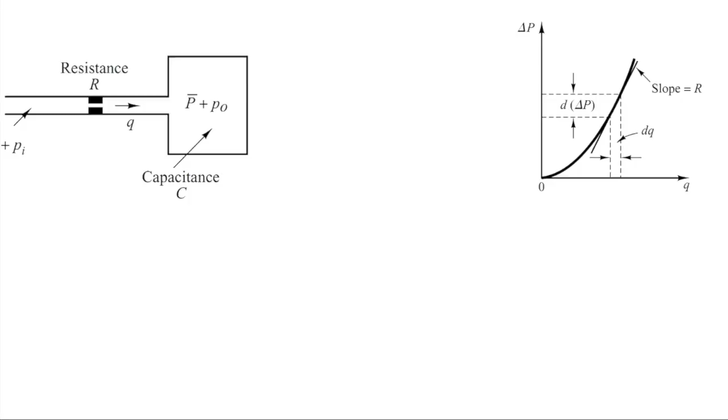Hydraulic systems, by this word we refer to oil hydraulics, which uses oil, and this oil is incompressible in nature. Whereas in pneumatic systems generally air or gases are used as the power transmitting medium, and these air and gases are compressible in nature, where oil is incompressible.

We will discuss this hydraulic system in detail later, but it is pertinent in this particular lecture to compare these pneumatic systems as well and hydraulic systems.

So number 1 difference is that this transmitting medium, one is incompressible, another is compressible. And number 2 is that air lacks lubricating property, whereas oil is also having lubricating property. So oil is used as a medium for power transmission as well as lubrication of all the components which are used in case of hydraulic systems.

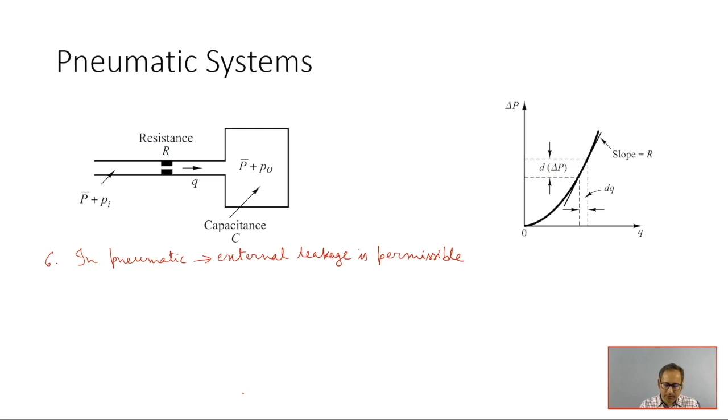Next comes number 6. In pneumatic systems, external leakage is permissible to a certain extent, but internal leakage must be avoided because the effective pressure difference is rather small. In hydraulic system, internal leakage is permissible.

So number 7 is no return pipes are required in pneumatic systems when air is used, whereas they are always needed in case of hydraulic systems.

So number 8 is normal operating temperature. For pneumatic systems this range is 5 degree centigrade to 60 degree centigrade, and this is generally acceptable. In case of hydraulic systems - here hydraulic means oil hydraulics only, not water hydraulics - the operating temperature range is 20 degree centigrade to 70 degree centigrade, almost comparable.

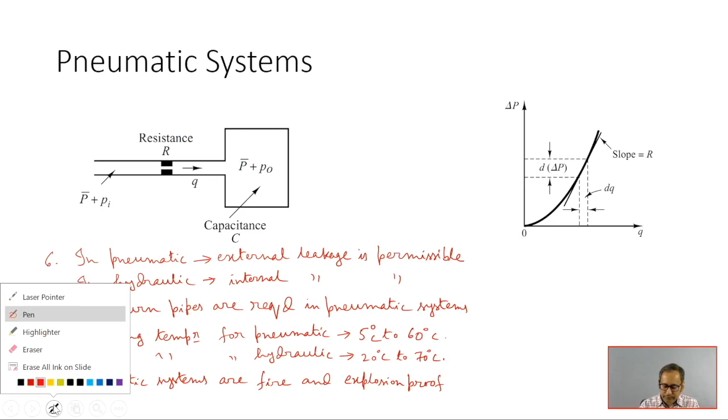Now I will give detailed discussion on the principle by which this proportional controller, by which different controllers can be designed using both pneumatic systems and hydraulic systems. Pneumatic systems comes first. Throughout the discussion I shall place emphasis on the principle of operation rather than on the details of the actual mechanisms. Only principle will be discussed. This pneumatic systems actually will be discussed first.

These characteristics of pneumatic systems are again described with the concept of resistance and capacitance. You can see from this figure, one is resistance R, another is capacitance C, similar to the liquid level systems. This P bar is the steady state pressure. Now if you change this steady state value, if there is a small variation of Pi, then there will be small variation of input flow, input pressure, and then there will be small variation of output pressure.

So in this particular system, this flow of air is filling up this particular vessel - this is the pressure vessel. Generally in pneumatic systems, different pressure vessels are connected through pipes, and inside the vessels this air or gases are stored at a higher pressure. That pressurized gas is used for opening and closing of different valves used in industrial automation.

So in this figure you can see this airflow Q is going to the vessel, and as a result this vessel pressure is increasing. Now if the upstream and downstream pressures are the same, that is at steady state P bar, then this net airflow will be zero. Now if there is some differential pressure, that is if there exists some delta P which equals Pi minus Po - input pressure small variation minus output pressure small variation.

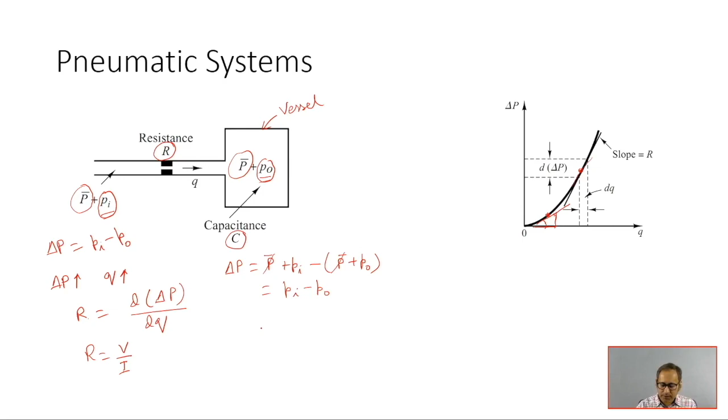By measuring this, as you have seen in the case of liquid level systems, this same concept is used here. Next is C, capacitance. So now let us focus on this capacitance C.

This capacitance C is defined in the same way: change in gas stored inside the pressure vessel divided by change in gas pressure. That means it is equal to dm by dp, where dm means V times d rho by dp, and rho is the density.

So it is in the same line again, analogous to electrical systems and liquid level systems. Let us now focus on this particular pressure system. In this context, R equals Pi minus Po, that is delta P, divided by Q, and C equals dm/dp.

That means the pressure change dpo times the capacitance C is equal to the gas added to the vessel during dt seconds. So in a small time dt, this pressure change dpo times C gives that relation.

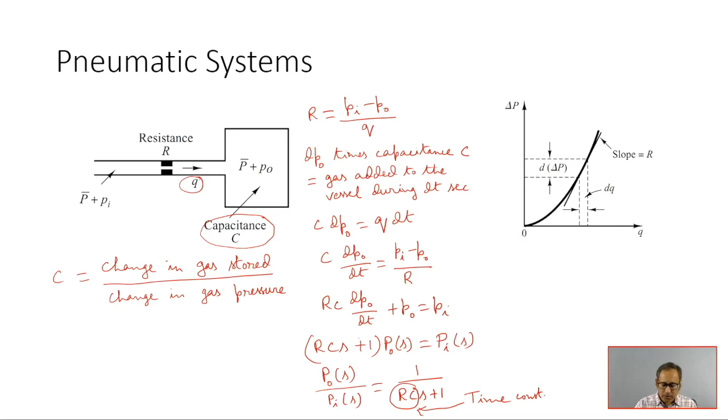So next, coming to the next slide, I am going to discuss pneumatic nozzle flapper amplifiers.

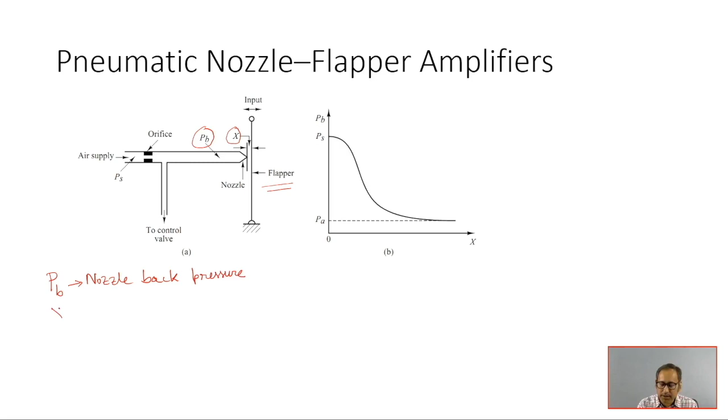This is controlled by the nozzle flapper distance X. As the flapper approaches the nozzle, the opposition to the flow of air through the nozzle increases. That means as X is reduced, X tends to 0, the flapper moves closer, so X is reduced, putting more restriction on the air flow, which results in an increase of the back pressure Pb.

If the nozzle is completely closed by the flapper, the nozzle back pressure Pb becomes equal to the supply pressure. If the flapper is moved away from the nozzle, so that the nozzle flapper distance is wide, then there is practically no restriction of flow, and the nozzle back pressure Pb takes on a minimum value that depends on the nozzle flapper device.

Look at this particular graph. Along this x-axis, this is the nozzle flapper distance. At this point it is wide open. So when it is wide open, the back pressure Pb drops to the atmospheric pressure Pa. There will be no restriction when this is wide open.

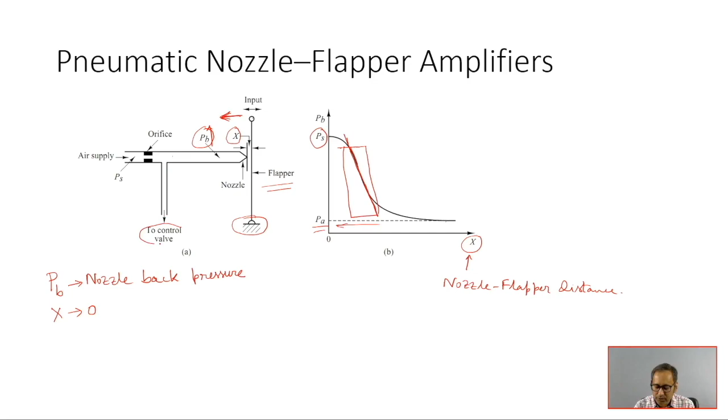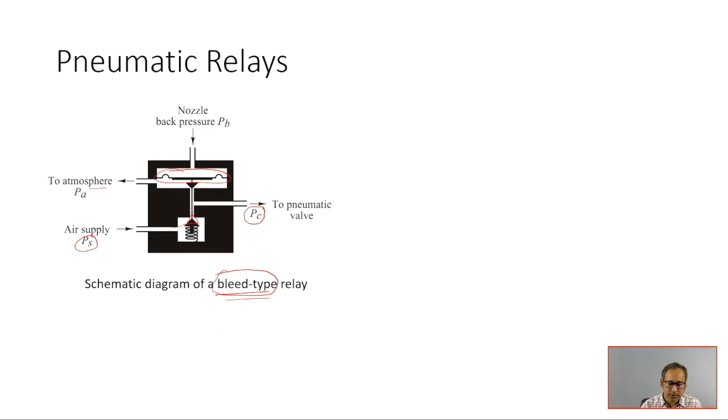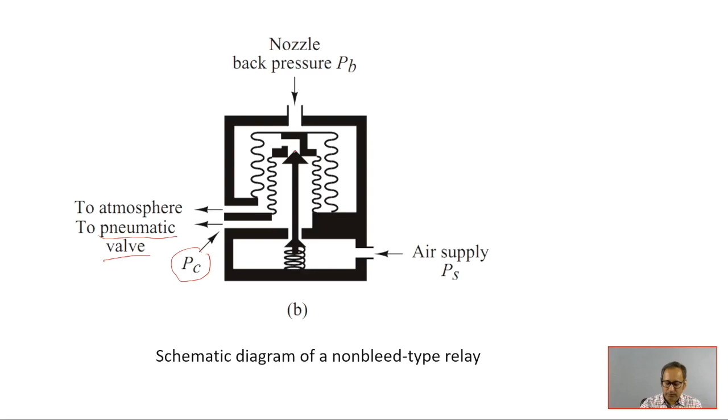So it is actually reverse acting. Generally, these relays are used in forward acting mode, meaning when back pressure increases, the control pressure also increases. But here the opposite happens — when back pressure increases, the control pressure decreases. This is called the reverse acting relay.

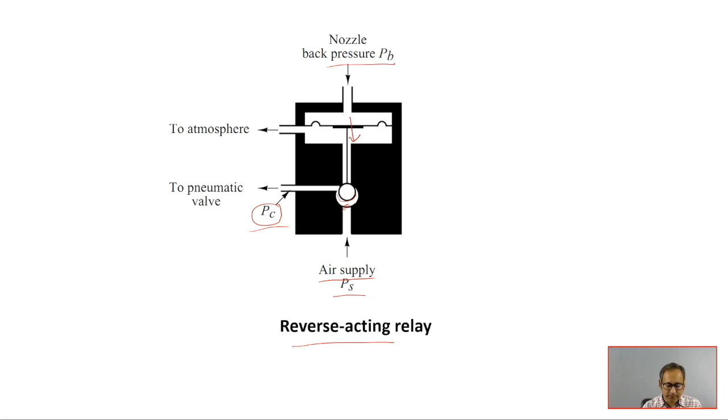Now I am going to discuss one pneumatic proportional controller. There are two types of controllers: one is force distance type, another is force balance type. In this lecture, I will focus on the force distance type. You can see in this figure the orifice flow here; the supply pressure is directly connected to the control valve, and the corresponding pressure is PC. As usual, this PC bar stands for the steady state value — all these bars stand for steady state values.

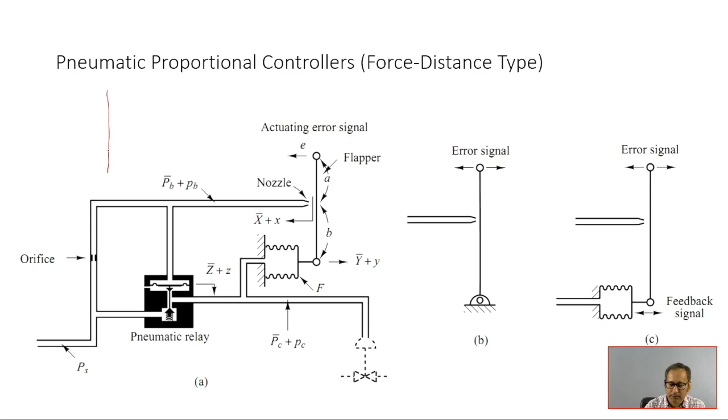So, if you give some actuating error signal here, this will be positioned like this. So, this distance is B from this point to this midpoint, and this distance is A. So, that means this is your A and this is B. So, actually we are concerned with this distance from here to here. So, let us say this is how, what will be this distance? Let us say this is D here.

So, D divided by E, using these similar triangles, D divided by E equals B divided by A plus B. That means D equals B by A plus B into E. So, this is your B by A plus B into E.

Okay, similarly, if you consider now this is, I have told you that this is also a linear system, a linearized system. That means you are considering small variations of x, z, pb, all the variables are having small perturbation. So, this can be approximated as a linear system, and in case of linear systems, the principle of superposition is valid. So, according to principle of superposition, this is one case.

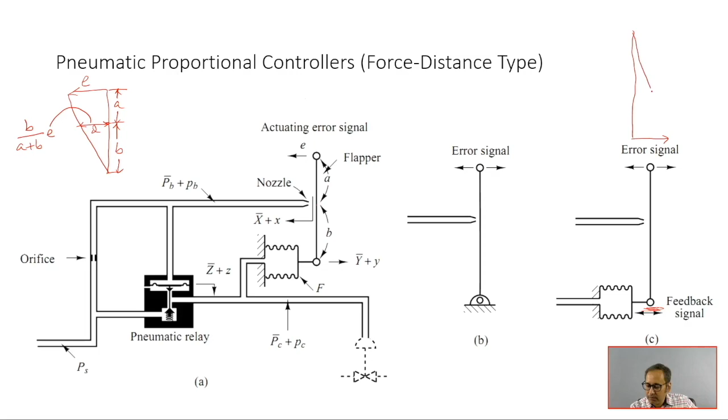So, this is actually original position. Now, due to this movement, this will be shifted to this side. So, let us say this is your small y, and this is your b, and this is a. So, what is this distance now? In the similar fashion, this is a by a plus b into y.

So, if you apply the principle of superposition, this is the original flapper, this is the signal E, and this is the signal Y. Notice that E should be greater than Y, otherwise you will not get this distance. If E and Y are almost same, this will be less, and if A and B are same and E and Y are same, then there will be no displacement of the flapper-nozzle distance.

To obtain this finite displacement, E should be greater than Y, that is, the feedback signal should be less than the actuating error signal. So, if the principle of superposition is valid, then this length x equal to b by a plus b into E minus a by a plus b into y. This relation is important for further discussion.

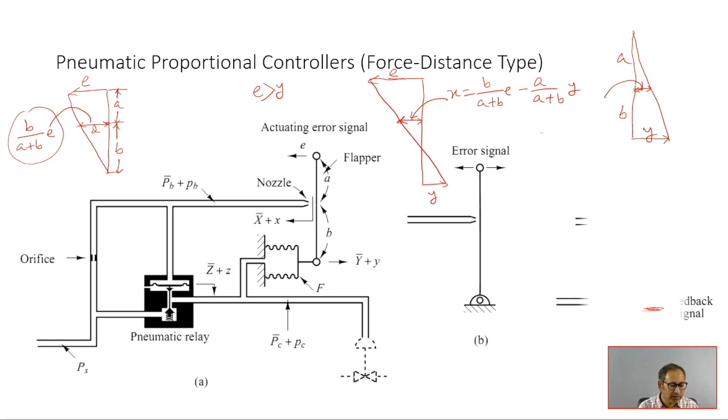Let us see the relation between Ys and Pc. So, Pc into A, where Pc is your control pressure and A is the area. Pc into A equal to Ks, the spring equivalent stiffness of the corrugated sheet, into Y.

So, Ys equal to A by Ks into Pc. Taking the Laplace transform, Ys equal to A by Ks into Pcs. We derived this earlier: Ys equal to A by Ks into Pcs. The Pcs multiplied by A by Ks gives you Ys.

In this summation block, you get the relation we derived: x equal to B by A plus B into E minus A by A plus B into Y. Taking the Laplace transform, B by A plus B into Es is the positive terminal, minus A by A plus B into Y is the negative terminal. So, you are satisfying this xs.

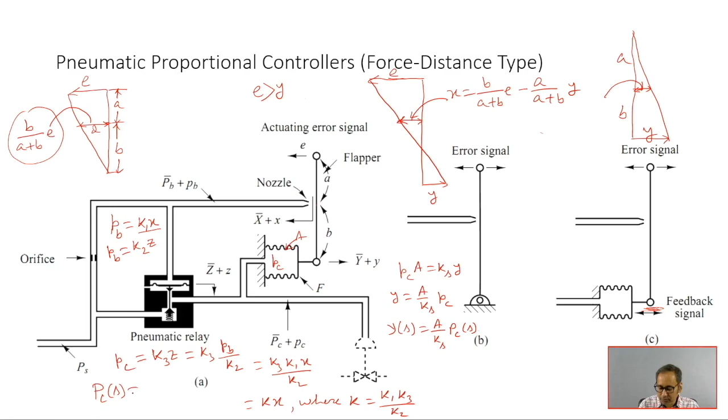So, Pc equal to Kx, that is, Pc S equal to K into Xs, as given here. This is the block diagram constructed for this pneumatic nozzle flapper amplifier. Now, this is the feedback signal, Y is the feedback signal.

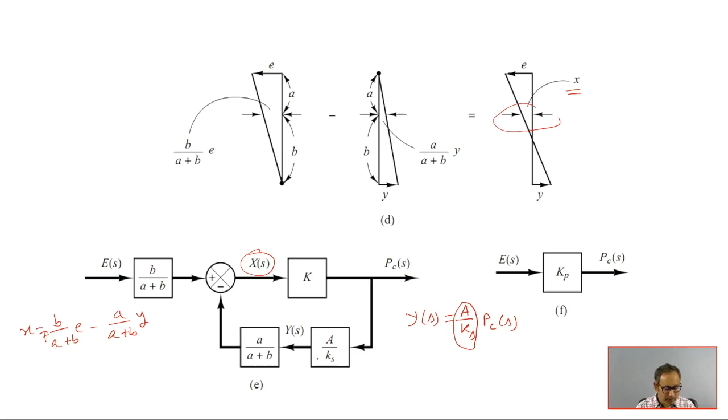So, if you find the transfer function Pcs by Es, it is equal to B by A plus B into K, since this is actually a negative feedback system, so it is G by 1 plus GH. This K divided by this is your H, and this is G, so G by 1 plus GH. This is replaced by this single block, multiplied by B by A plus B.

Now, although all are constant, you can vary this A and B by using a particular mechanism which is not shown in this drawing, but in most commercial proportional controllers an adjusting knob or other mechanism is provided for varying the gain by adjusting this A and B.

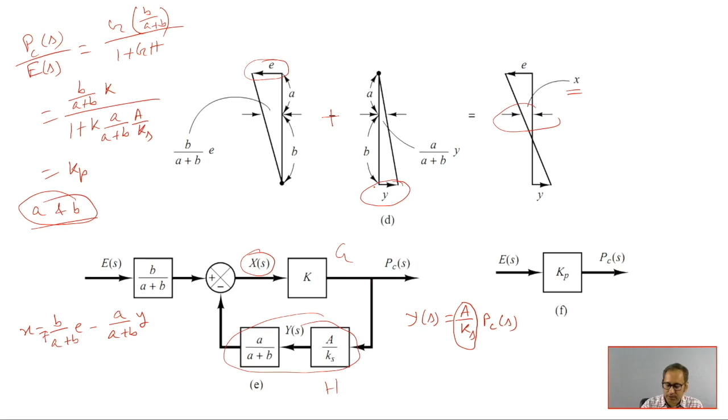So, see this particular feedback mechanism, this Y, this is actually negating the effect of this actuating error signal. So, it is somewhat nullifying this actuating error signal. So, in that sense it is not very much sensitive. So, this plus this equal to this. So, this is not quite sensitive compared to this fixed fulcrum flapper.

So, that is the point to be mentioned here. So, see, it is actually this PS. If this is fixed position, then it is comparatively more sensitive, but you will not get the effect of this proportional control action. It is actually to some extent more sensitive, because it is not placed on the floating point, it is rigidly fixed on the pivot. So, there is no feedback coming here that will nullify to some extent this actuating error signal.

So, as soon as x is changed, see, there is a steep change here, this PS to PA, an abrupt change, but in case of the earlier design there was a gradual change. So, it is called pneumatic two position controllers. Pneumatic two position means on or off, two position controller or on-off controller.

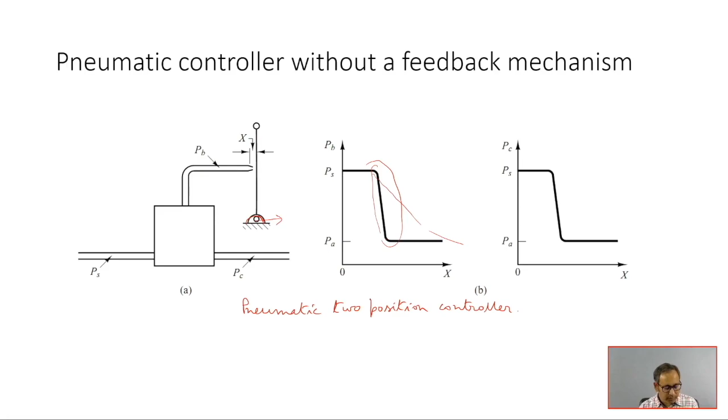So, now I am going to discuss this basic principle for obtaining derivative control action. So, the basic principle for generating a desired control action is to insert the inverse of the desired transfer function.

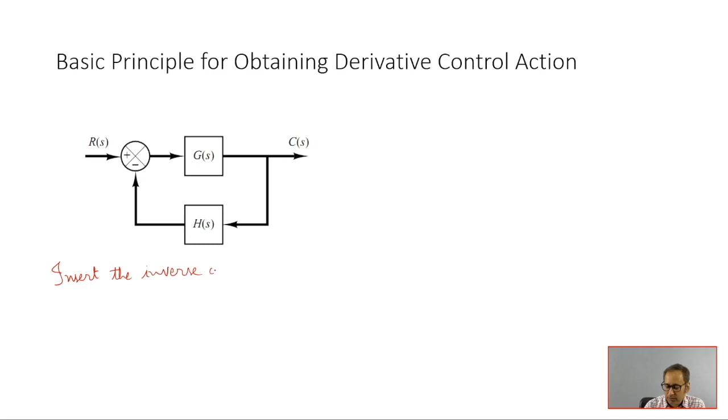Insert the inverse of desired transfer function into the feedback path. That means here. So, for this case, what is the closed loop transfer function? Cs by Rs equal to G by 1 plus GH.

Now, if GH is very high, then you can see that Cs by Rs can be approximated, since this one is negligible compared to GH. So, this is approximated by 1 by H.

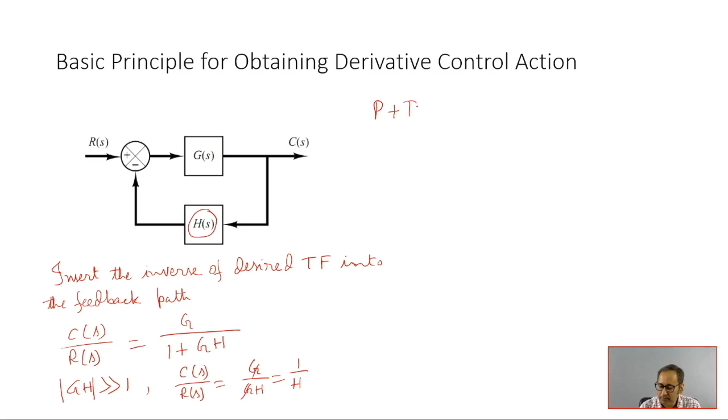Now, if proportional plus derivative control is desired, then we can insert an element having the transfer function 1 by Ts plus 1 in the feedback path. That means here Ts plus 1, if this is actually 1 by Ts plus 1, that equals Ts plus 1. So, if this is multiplied with this input, then it gives proportional plus derivative. So, this is the derivative term, this is the proportional term. That is the basic idea which we are going to use in the subsequent slides.

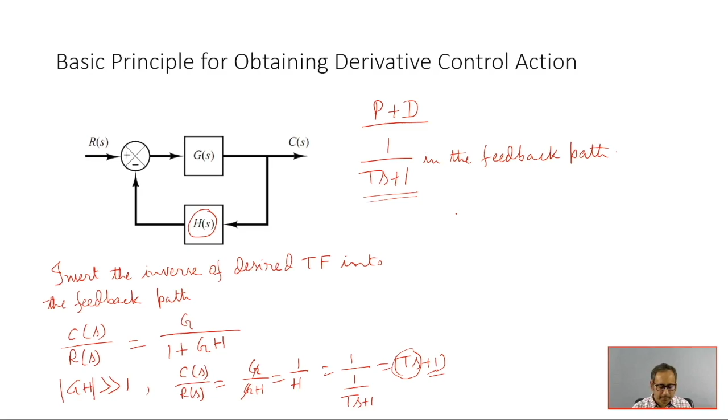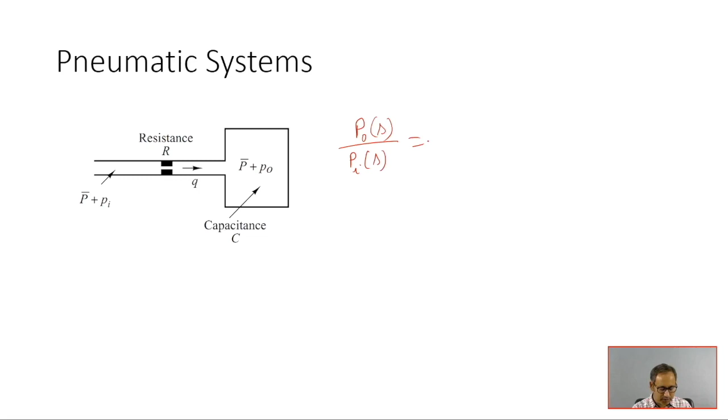You have already seen, I have discussed that in case of a pressure system, that P0S by PIS. Let me come to here. Here I was discussing the transfer function P0S by PIS. This was derived earlier as 1 by RCS plus 1. So, RC is basically the time constant. So, this is 1 by Ts plus 1.

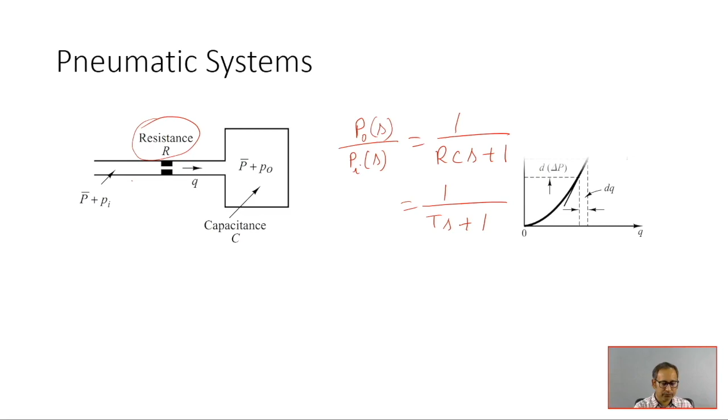So, that means if you put one resistance here, this is for this resistance R. So, if you put this resistance here, this downstream transfer function by upstream transfer function is equal to 1 by, having this type of structure. So, here also you will use the same idea. So, in this case, this pneumatic proportional controller.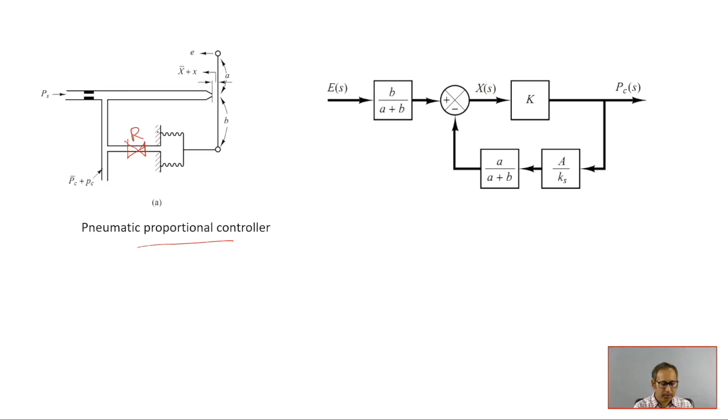Now, here see the difference between these two. In this case this is direct, so it will lead to a proportional controller. Now, if you put one restriction here, that is the R element, that is done here. So, that will give you this pressure divided by this pressure, equal to 1 by RCS plus 1.

So, that means here you can see, in this case, this is your RC, 1 by RCS plus 1, that means up to this it is okay.

ES, B by A plus B, there is no change in this structure, A by A plus B, A by Ks.

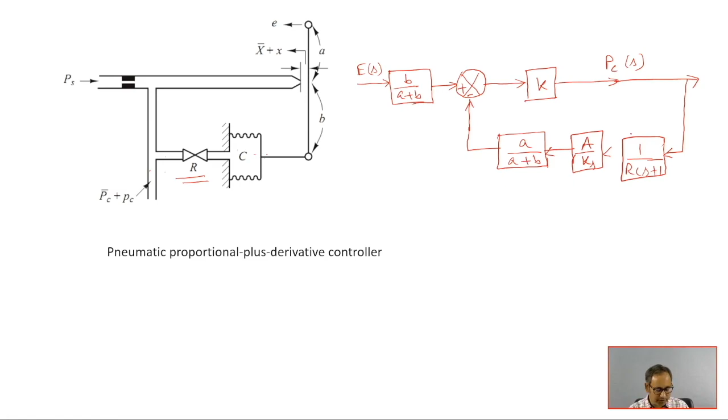So in the feedback path, this 1 by Ts plus 1 type of transfer function is incorporated. So after this, it is connected as it is, as before. So only change is happening here. This PCS is forced to go through this particular resistance, and that will include this type of transfer function in the feedback path.

Actually, this idea is that this pressurized control pressure, this PC, this particular air is slowly going to this capacitor C. So if you consider this actuating error signal E versus time t, let us say this is the actuating error signal. You have pressed this particular pedal like this. So this control pressure PC, we plot this PC versus time.

So that means this effect, this is the effect of addition of the restriction in the negative feedback path. This will modify this proportional control to proportional plus derivative control. So this is actually PC will be gradually...

And similarly this X also. So that means this feedback bellow, this is called the feedback bellow. This feedback bellow will feel the full effect of the actually, this feedback bellow will not respond momentarily.

As soon as you are giving this X, this feedback bellow will not respond momentarily, and the pneumatic actuating valve will feel the full effect of movement. Just to make you understand physically, when you are giving this E, at this particular moment this Y will not be affected, Y will be almost 0 because of this restriction.

So this feedback bellow will not respond momentarily, and the pneumatic valve will feel the full effect of the movement of the flapper. As time goes on, the feedback bellow will expand. The change in the nozzle flapper distance will be in this particular way. So this is the clear characteristics of the proportional plus derivative control action.

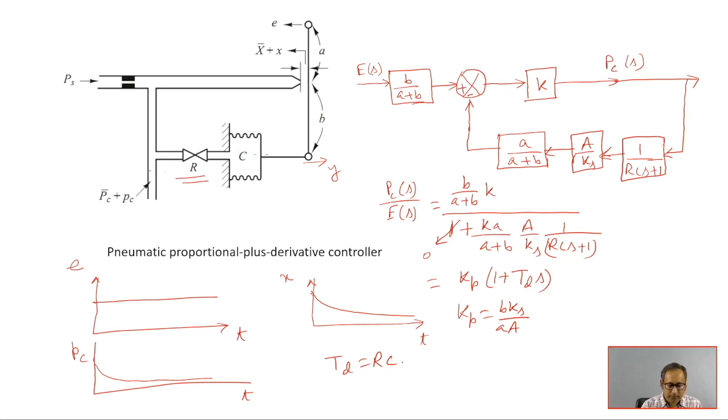So you will get this structure, this is equal to Kp times 1 plus Tds, where Td is the differential time and Kp is the proportional gain. Kp equal to Bks by Aa, and Td equal to Rc, the differential time constant. So this is actually the basic principle of pneumatic proportional plus derivative controller.

Next, this is pneumatic proportional plus integral controller. In this integral controller, this design is slightly different. This restriction is given here instead of the previous point, it has come to this point. In case of derivative control, it was here; in this case, it is at this point. So this bellow is separated by two chambers, 1 and 2. This whole capacitance is C.

Now, when this will be moved in this particular direction, if you plot this error signal as before, the error signal is this constant signal you are giving. So, what is the displacement of x now with respect to time? So, x will be started here.

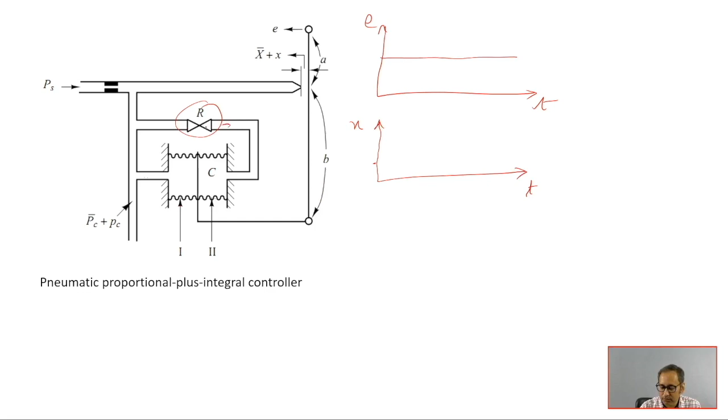See, initially this part is restricted, fluid flowing through this part is restricted. Now this part is open. This bellow has one link at the intermediate point of the bellow, connected to the floating point. So initially this will affect this feedback y. So this y, it will feel the effect of this feedback. So due to this y, this x will be reduced, the x will be starting from here, let us say.

So, as time goes on, this air flow will start, air will flow through this restrictor and it will apply force in the opposite direction. So this will come to the opposite direction, and it will gradually nullify this effect of y. So that means as this x gradually nullifies this effect of y, this x will also increase.

Similarly, this Pc, control pressure Pc, will also follow this particular path. So this is the characteristics of PI control. So in this case, this PCS, this block diagram, I think it is drawn here. Yes, the block diagram is drawn here.

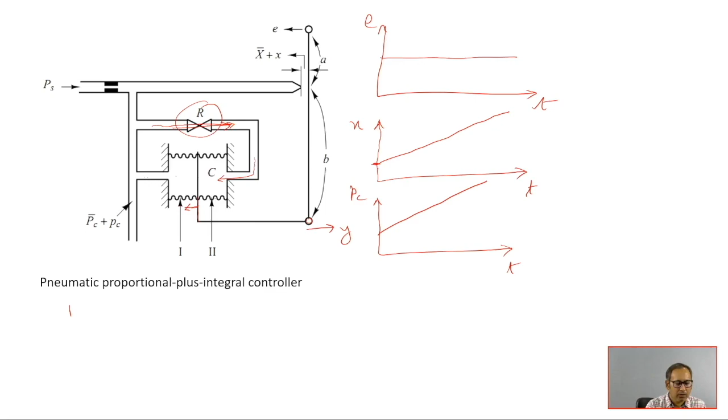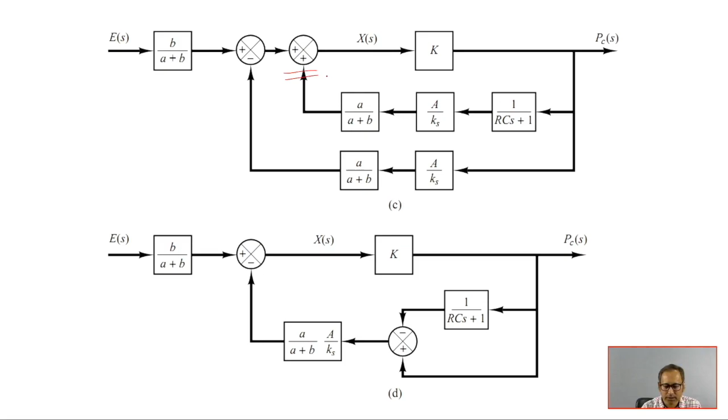In this case, this is the corresponding block diagram. See, this is the summing block, that means two signals are summed up here. Okay, let me do one thing, let me copy this particular figure to here.

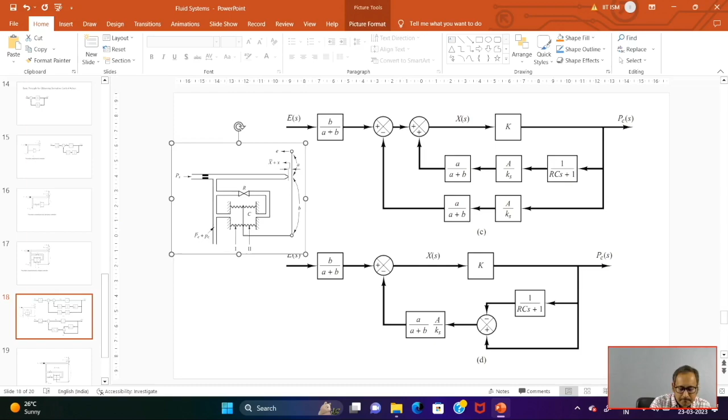Okay, now it is visible. So, look at this figure here. These two signals are basically, this part is okay. This is the summing block. Now, this is your positive feedback.

This is your positive feedback part. So, let me explain this one. This PC is connected to here. One is this one, this A by Ks, this is as it is in case of proportional controller. So, this part is already explained.

Now, come to this part. This restrictor is put here. So, due to this restrictor, this is the corresponding transfer function. So, then that is multiplied by A by Ks, then this part is okay.

So, this signal is going to add with this signal. So, this is the feedback signal. After this feedback signal, this was moving to this side. So, gradually it is again moving to this side. So, when it is moving to this side, look at this arrowhead of E. So, this is actually same arrow, same direction. So, that is why these two will be added. So, it is actually giving some positive feedback.

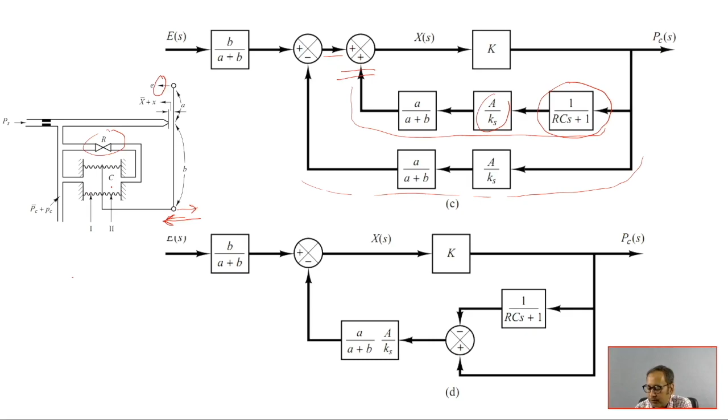So, now this is the next step. In the next step, this is actually simplified diagram of this. Up to this it is okay. Now, this is in this way, it is minus, this minus terminal is here, minus terminal is here. That means, this effect is, this particular position, this particular transfer function is same. So, that is why A by A plus B into A by Ks.

Okay. Now, this is common to both this path. So, next you consider this minus and this plus. That means, this plus into minus, that is, it is going to negative terminal, and this minus into minus, that is why it is plus. So, these two effects can be combined by this particular structure.

Now, this is in the next step, this is actually replaced by this signal into 1 minus, this is actually parallel connection. So, this whole thing will be replaced by this 1 minus 1 by RCS plus 1.

So, this is your PCS by ES equal to B by A plus B into K divided by 1 plus K A by A plus B, A by Ks into 1 minus, this is your 1 minus 1 by RCS plus 1.

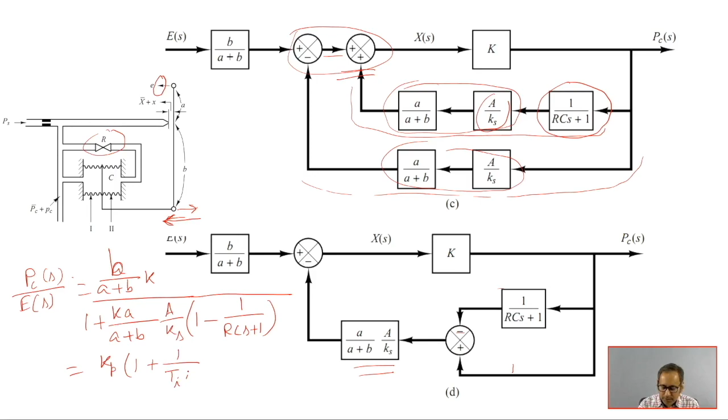So, this ultimately takes this form, this is ultimately simplified to 1 plus 1 by TIS. TI is the integral time constant. So, Kp is equal to proportional gain, Bks divided by AA, and Ti equal to Rc time constant, integral time constant.

So, next is proportional, this is your Pi control, P proportional plus integral, Pi control. PD control was discussed earlier. So, if you combine this PD and Pi control action, then you will be able to design and find out PID control. So, this is the combination of these two. See, this restrictor is put on this path as well as on this path.

Try to understand this difference. Here restrictor was put on this feed forward path. Here this restrictor is put on this feed forward as well as feedback path. So, it is leading to proportional plus integral plus derivative, that is PID control action.

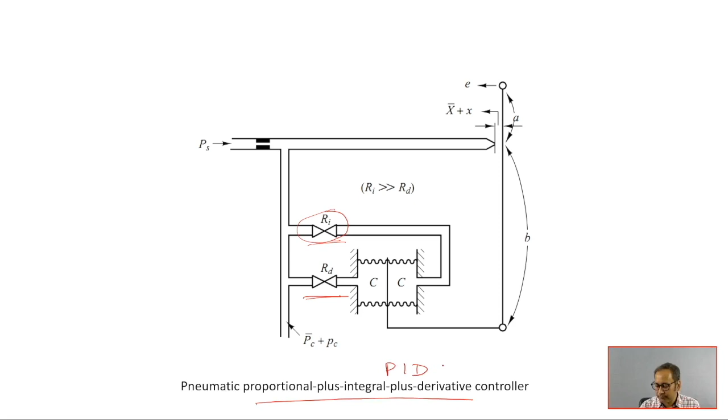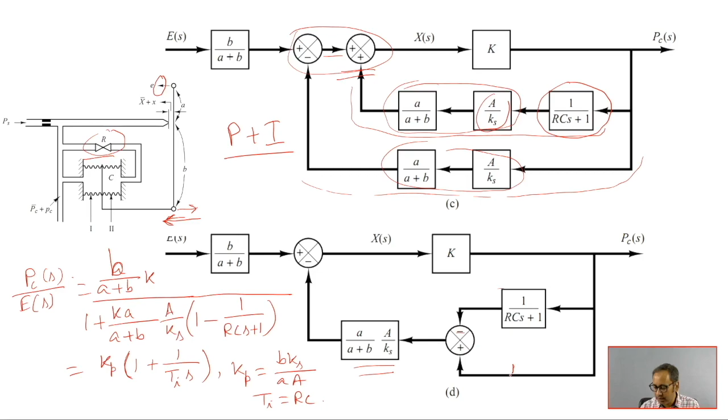Okay. So, this is actually a combination of these two. Instead of 1, it is now RDCS plus 1. See, look at this, compare this 1 by RCS plus 1 in this case. In case of Pi, that is coming to negative port, whereas this was 1. Now, in this case, this will be Ri going to negative and Rd will go to positive terminal. See here, Ri goes to negative and Rd goes to positive terminal of this summing block.

So, now this will give you the design of PID control action. So, similarly you can find out this PID, that means PCS by ES. This is the output, this is the input. PCS by ES equal to BK by A plus B divided by 1 plus Ka by A plus B, A by Ks, okay, into

RIC minus RDCS divided by, after simplification this will come to RDCS plus 1, RICS plus 1. So, this is equal to, now as before, this 1 is negligible compared to this term. This is usually a large value, mod of this is much greater than unity.

So, ultimately it will be reduced to this structure: Kp into 1 plus 1 by TIS plus TDS. Okay, where Kp equal to Bks by aA, and Ti equal to Ri C, and Td equal to Rd C.

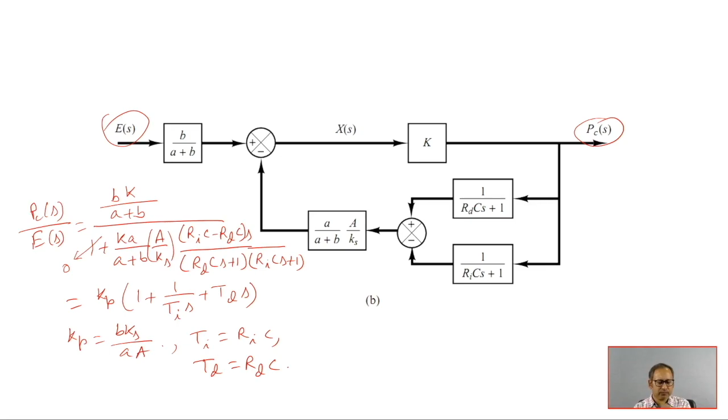Okay, so that is all for this pneumatic controller design. In the next class, this hydraulic controller will be discussed. So, thank you for your attention.